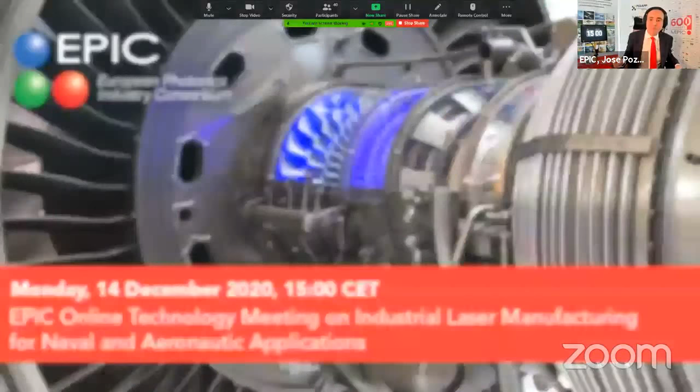Wow, the numbers in the EPIC meeting on Monday, December 14th are going to blow your mind. Imagine if using plasma at 30,000 degrees C is part of your daily routine. You wake up in the morning and today you had to build a 360 meters cruise ship made of steel with up to 40% less material and 40% less energy. And that's where photonics comes in.

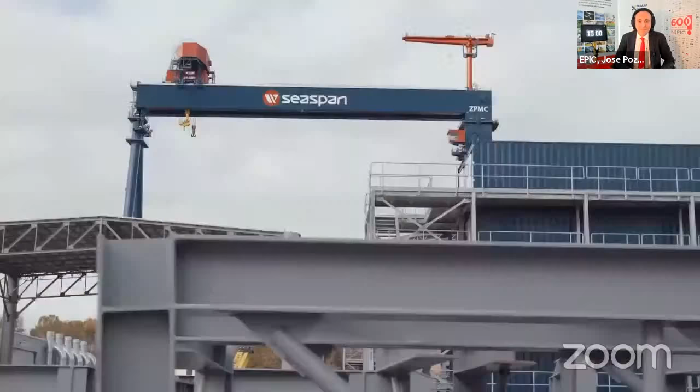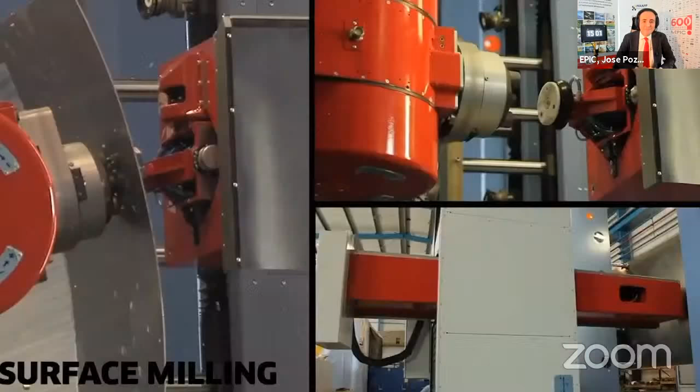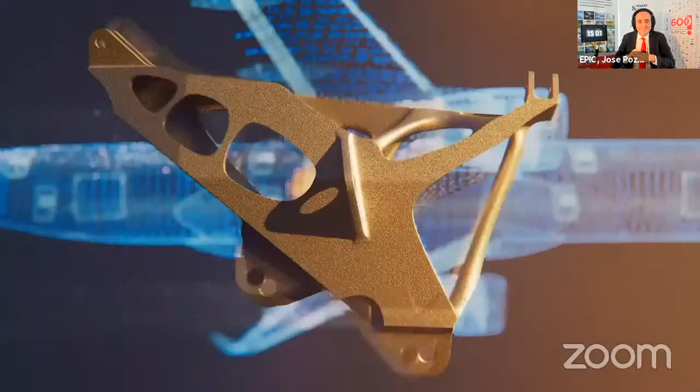Modern shipyards need laser hybrid welding processes to join vast steel panels. Heat has always been crucial in building steel constructions. Laser processes result in highly controlled metal melts to precisely fill the seam. The aircraft industry has two additional requirements: lightweight and aerodynamics. Manufacturing processes are expected to result in rivet-free surfaces. In addition, carbon fiber, thermoplastics, and new materials have to be manipulated with zero waste.

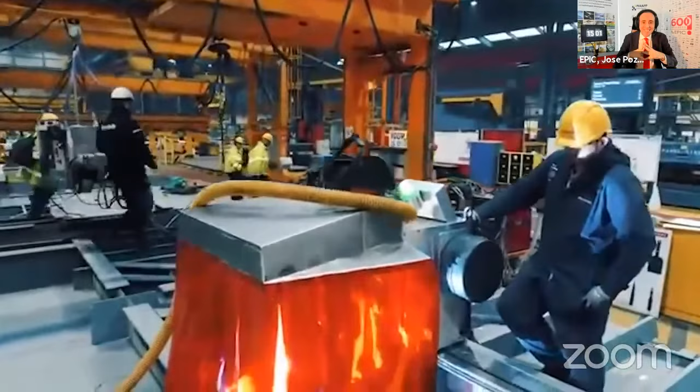And in a world of leased aircraft and marketing campaigns, quick painting and especially depainting has to be faster and cheaper. So what will the shipyard and aircraft hangar of tomorrow look like? What are the challenges in making the next generation high-power CO2 and fiber lasers? What shape is needed for the optical beam in processes involving such high power? On December 14th, we'll examine the next steps for shipyards and aircraft manufacturers and how high-power lasers and their supply chain are key to this competitive industry.

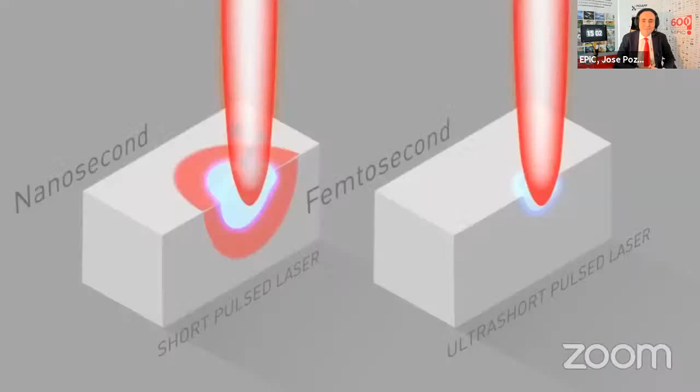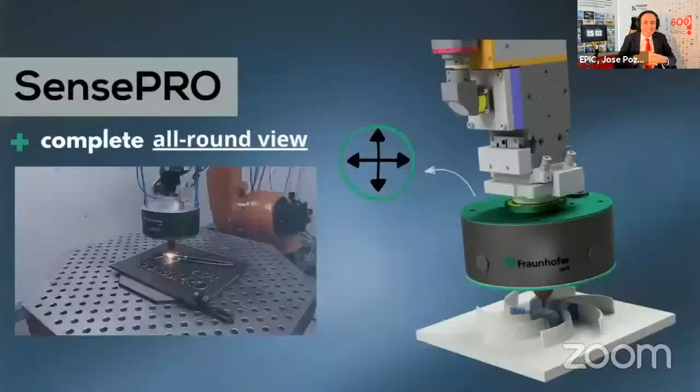My VIP list includes laser industry leaders like Trumpf, Laserline, Precitec, Georg Fischer, Siemens, Prima, Lumentum, SPI, and their current and dream partners such as Fincantieri, Avio Aero, Safran, and ArcelorMittal. And to make the innovation happen, we need the research powerhouses like Fraunhofer, AIMEN, Lasercentrum, and Hilase.

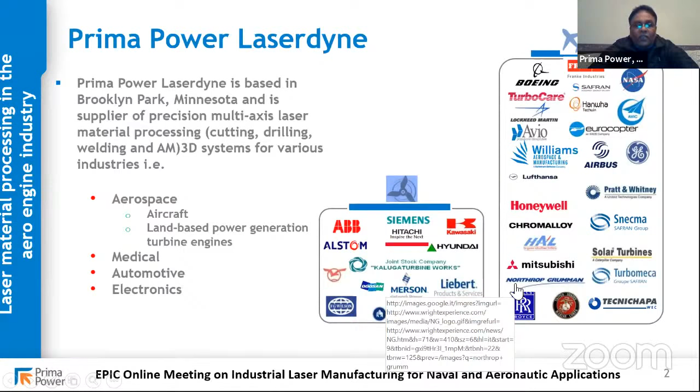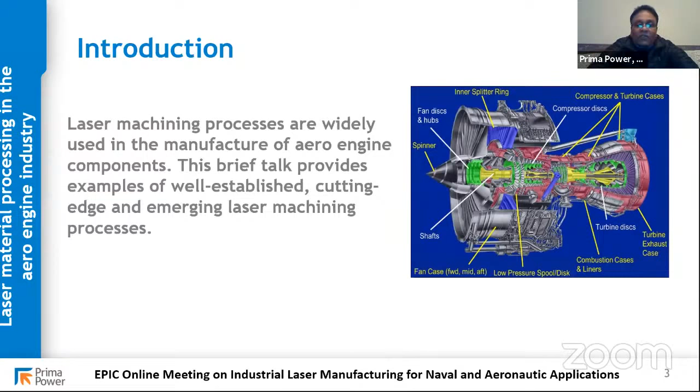In aerospace there are a lot of applications of laser processing, mainly drilling, cutting, and welding, and this presentation will highlight some examples of using lasers in manufacturing aero engine materials. As you know, laser drilling has been around many years, and it's the number one application right now in the aerospace market.

In the past, people used Nd:YAG lasers, but in the last few years they've been using QCW fiber lasers. People use laser drilling for these very difficult materials, all nickel-based alloys, which are extremely difficult to drill conventionally, so they end up using lasers. The advantages of laser drilling are that it's very quick, it's repeatable, and you can drill at different angles.

If you look at hole drilling, these are some of the components: blade, vane, afterburner. These are typical diameters; you tend to drill 0.3 to 0.5, and then typical thicknesses. The number of holes ranges from a few hundred up to 40,000 holes currently drilled using lasers.

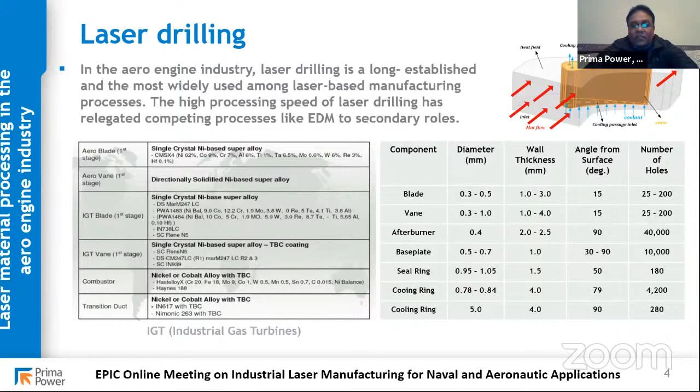With laser drilling you can drill using different methods. One is trepanning, where you actually cut the hole out. The other is percussion drilling, where you do a single shot, which is very quick. The difference in timing is large: if you've got 40,000 holes to drill, it will take a long time to trepan, so people tend to percussion drill. With trepanning, you tend to get very good quality in terms of taper and recast layer.

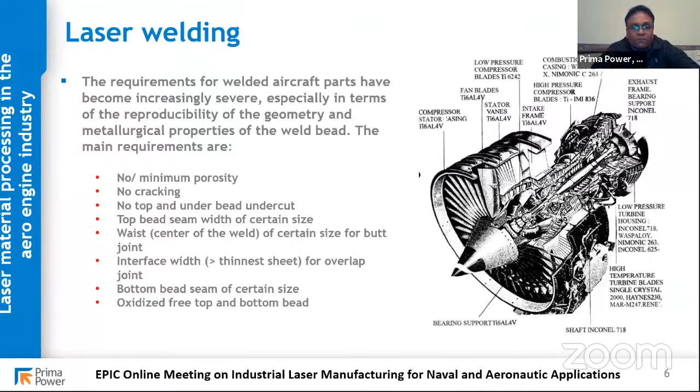The typical requirement in laser welding of aerospace material is not cycle time, but quality. No porosity, no cracking. The weld width has to be a certain dimension, top and bottom, to give the strength. Most of these materials are either Inconel or titanium, so gas shielding to avoid oxidation is very important.

Unfortunately, when working for aerospace clients, you cannot share most of the information since it's confidential, so I can just highlight generic data. This is a 3.2 millimeter butt joint alloy, again very nice weld, no porosity or cracking. Haynes 230, Inconel 718. There's also a requirement to weld this material using filler material, because sometimes the fit-up is not so good, or there are metallurgical requirements, so we end up using filler.

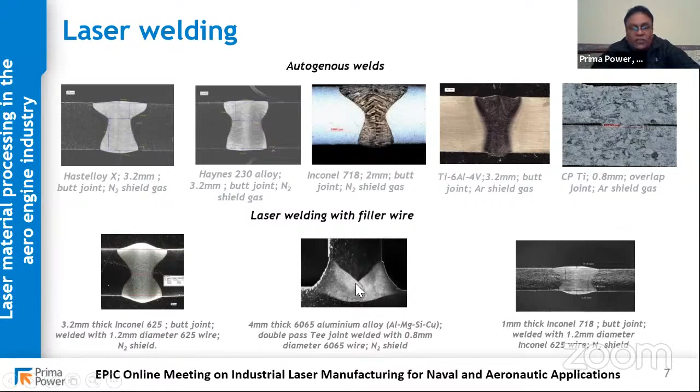So this is Inconel 625 using Inconel 625 wire, and you can see a beautiful top bead and bottom, with no undercut. This is a T-joint, again using filler material. So there are requirements for using filler in welding of aerospace material.

Laser cutting is another application where a lot of 2D and 3D cutting is being done. This is an example of a blade profile cut in 5 millimeter thick material for a land-based turbine. This is Hastelloy X using nitrogen, showing very good repeatability and very small dimensions.

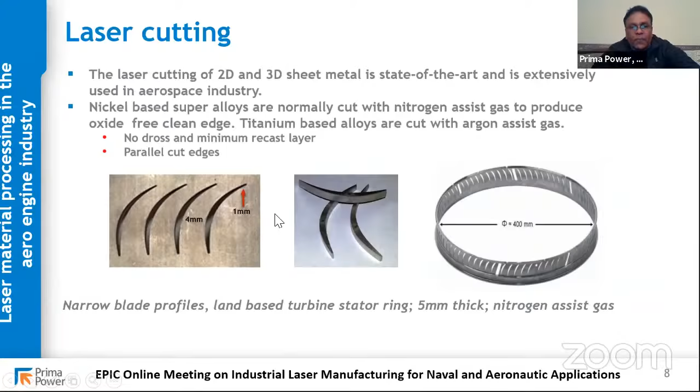Another area gaining a lot of interest is composite material, which includes plastic composites or metal matrix composites. This is one example video of a metal matrix composite. The hole depth is about 35 millimeters deep, and this is actual percussion drilling. You can see it's taken about 10 seconds to drill the hole.

The actual depth of the hole is about 35 millimeters, which is about 1.38 inches. For this one, you can't cross-section it, so we actually measure the hole taper using a pin gauge. This is about 35 millimeters deep, and now we're going to put a pin gauge through to make sure the hole is quite parallel.

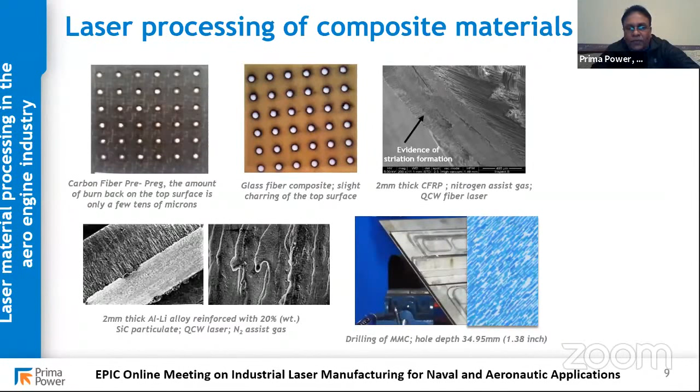So these are some of the things currently being done with composites, and the outlook, especially in aerospace and space engineering, is very promising. A lot of interest has been generated looking at dissimilar materials, so that's welding new alloys, basically welding a different grade of Inconel, or stainless steel to Inconel.

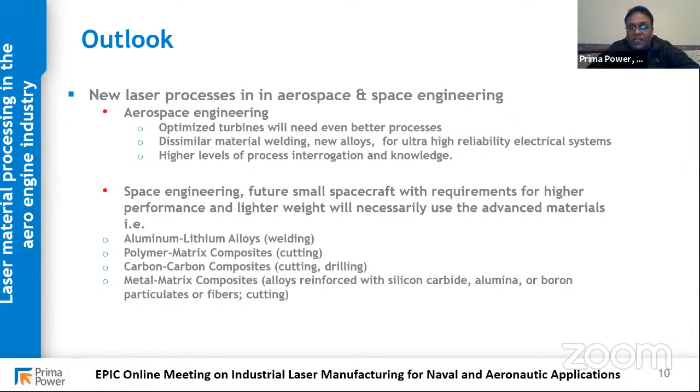There's also a lot of interest in aluminum lithium alloys, again for space engineering and spacecraft, where weight is very important. Polymer matrix composites are used again for cutting, drilling, and surface modification. The biggest interest right now is metal matrix composites, where we're looking at different silicon carbides, alumina, boron, nitride carbide, which are very difficult to drill, so we're doing a lot of work on it. Another thing I didn't mention, which is quite big in aerospace, is additive manufacturing, but that's a separate topic altogether.

So that was just a brief introduction of what lasers are currently doing in the aerospace market, especially for aero engine materials. Thank you very much.

Thanks a lot for this nice overview. So now, I'll ask you the EPIC question that everybody else will also hear, so they'll be prepared for it: what can you do for the audience, and what can they do for you? The audience has over 650 people, as already pointed out. We are a bit here, but we have potential. So Mohammed, what are your interests in being in this meeting today? There are some end users, some integrators, some laser experts like you. So what is the room for collaboration here?

Well, basically when working with aerospace material, it's very difficult to actually buy this material off the shelf. So it would be nice to work with end users who can give us the right sort of materials, to make sure that whatever R&D work we're doing with lasers is actually useful to aerospace people. Like when I showed the last slide drilling the metal matrix composite, it's very, very difficult to get this material.

So it'd be nice to have end users who make these materials work with them and see what the laser can do with that material.

Very good, so you're offering really directly for end users to come. I'm repeating this: contact Mohammed or us, and we will put you in contact with Mohammed. So composite materials, we saw you have a long list of combinations and expertise.

I'm sorry for the... Never apologize to us. The presentation is already up, we'll show it from our side. The floor is yours, are you seeing the screen now? Yes, we see the slides. We are sharing them from our side. All you have to do is present away. Okay, it's Francesca, okay, yep. Sorry, I am using a private computer and I did not try before.

No problem. So yes, I am Christophe Simon-Boisson, I am a product line manager for scientific industrial lasers. So I have 5 slides, let's go to the next.

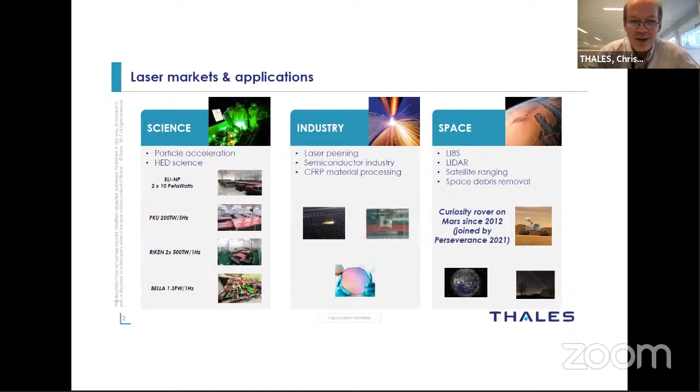Briefly, just to say where we are involved: we work basically in 3 areas. Science, where we are mostly now with very big projects - the pictures are quite small, but we have been the first to successfully deliver 10 petawatts for high peak power lasers for science. Industry, which we talk about after, but also space - right now we have a laser on Mars for 8 years, and it will be joined next year by another one which is right now in space. I don't say more, let's go to the next.

The idea is to send the pulse to a metal part. With high peak power, you vaporize some material and create a plasma. You have to confine this plasma in order to have a maximum effect, to optimize your effect, and it will generate a shock wave into the material. This shock wave is important because it creates constraints in the material - compression constraints - and these compression constraints are very useful for the lifetime of such parts.

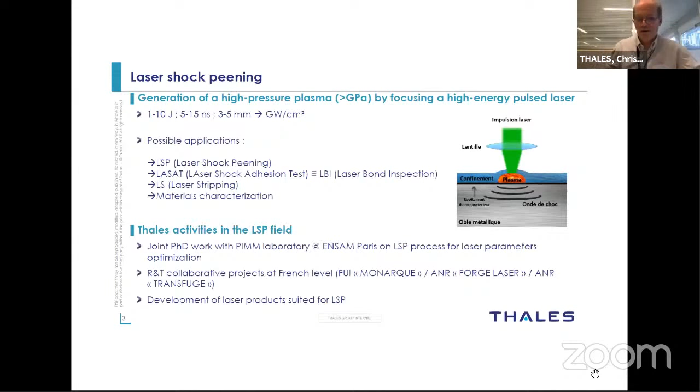And last but not least, we already have products in the portfolio, and we are also continuing to develop some laser products which we think are suited for LSP. So maybe let's go to the next slide.

So that's the reason why this process has become quite popular for aircraft industries, because by using this process they want to increase the fatigue life of parts, so that maintenance is less frequent and less expensive, because they don't have to change the parts if there is too much damage. So there are real economic stakes here.

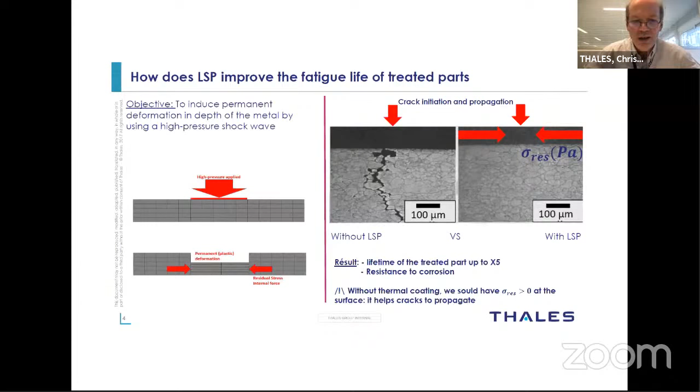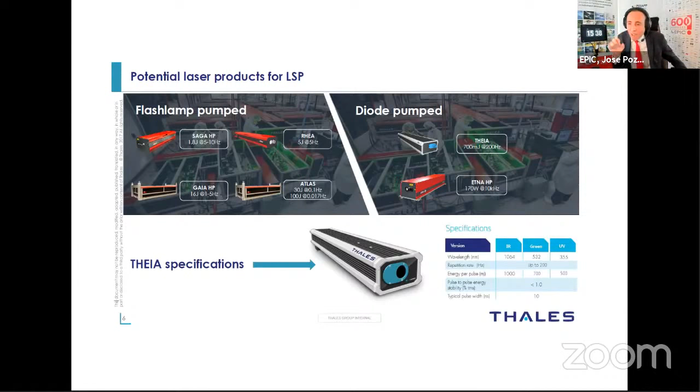Christophe, this is spectacular, really spectacular. You know, when Francesca told me that Thales was going to give one of the first presentations, honestly I was thinking they're going to tell us about their position in the market and how important it is as a prime for aerospace. You told us about the LSP technology and the clear challenges. And Christophe, we have a lot of questions for you, really a lot of questions. There's huge room for cooperation.

So let's start. I have the first question from OPTOMAN. Giuseppe, how are you doing today? The floor is yours. What's your question?

Hi Christophe, this is Giuseppe from OPTOMAN. My question was just related to the fact if you have ever tried to use short pulse lasers to perform the laser shock peening. I read some articles and it seems this could be an evolution of the standard diode pump or double rod lasers. Sorry, I did not catch your question. The question is whether you tried with a short pulse laser like picosecond or femtosecond lasers.

Ah, okay. Right now, the research group we are working with the most in Paris, they don't really think that lowering the laser pulse duration is so effective. But this is a very good question because, for example, there is one group in Japan, at Osaka, which is trying to develop the process with femtosecond lasers. To my knowledge, it's only this group right now, but there might be others in the future.

And of course, what we have to do in the very near future is to work still with nanosecond pulses, but maybe try to reduce a little bit the pulse duration. What we are doing now, our next step, is to have some first process platform in Paris at this lab with a THEIA, and try to make some process optimization and potentially parametric studies as a function of pulse duration. But at first with a limited range, typically from 5 to 20 nanoseconds.

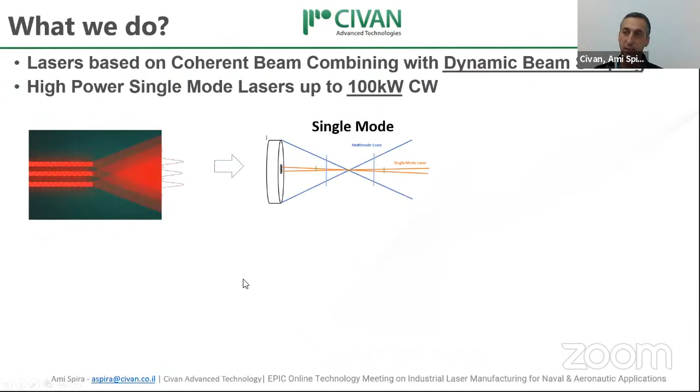So what we do is we develop high power fiber lasers based on coherent beam combining. So we can offer single mode CW lasers up to 100 kilowatts. And just to explain, by controlling the relative phase, we can control the location of the beam. So one main advantage of having a single mode laser with small diffraction is that we can have remote operation. This is very useful for welding in aerospace and aeronautic applications. And the second and most interesting thing is the ability to have the dynamic beam, which is basically unlimited beam shaping and beam steering.

So just one example of how this can be used in drilling applications. When drilling in a material that is coated, you can adjust the power distribution for each layer and very quickly switch between the different beam shapes. So what we, Civan, can offer, because we have the ability to design almost any arbitrary shape in just a few minutes, is to test in our applications lab any crazy beam shape that someone wants to try. And what we are always looking for is any challenging application that can use beam shapes or different power distributions that cannot be solved at the moment. We are always looking for new challenges to try in our applications lab.

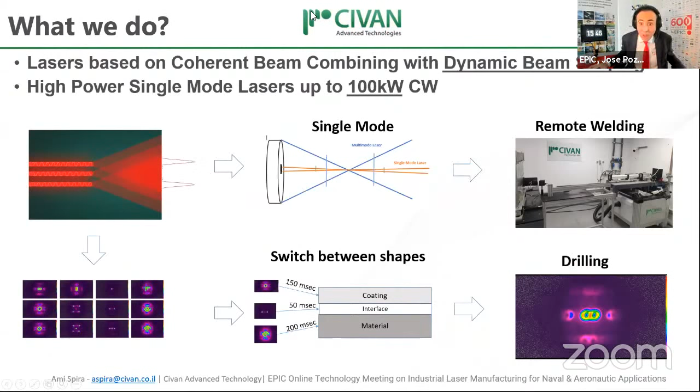Thank you very much, Ami. What kind of cooperation would you like to do with Christophe? This meeting is about cooperations. Yes. I love putting people on the spot, asking what can you do for him? Yes. So I think it comes back to what I said. We are always looking for ideas for different beam shapes that can help different processes, and designing new beam shapes that can support these different processes.

So why don't we continue the Eurovision tour? And now, wait, Ami, because there's a question for you. Tim from Fraunhofer IAPT, what's on your mind? Yeah, hello, also from my side. I have a question to Civan about the beam shaping equipment. How big is the spot size of your laser compared to a single mode laser? Because this is really critical for some applications, I guess.

Yes, so because it's single mode, it really depends on the optics. Yeah, but if you have the same optics, how much bigger is the spot size compared to a single mode laser? Is it 2 times as big, 3 times as big? So I think the answer depends on the model of the laser. For example, in the OPA6, you have what is called the main lobe, and then you can steer it or move it in a range of 6 times the main lobe. So if you use 50 microns as the main lobe, you can steer it around in up to 300 microns.

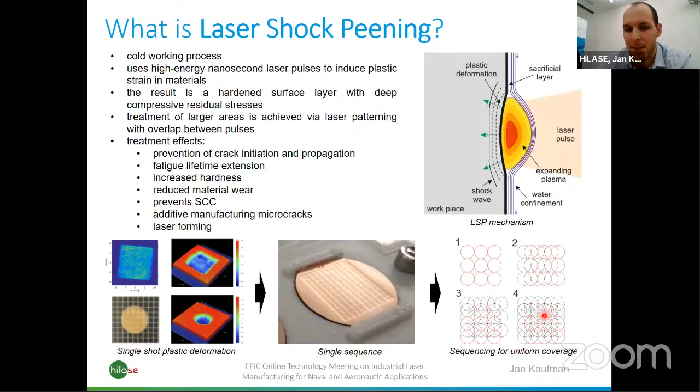The closest thing we have to laser shock peening in industry right now would be shot peening, which is very similar, but instead of laser pulses, you use these high velocity balls that basically hit the material and create this dimple, this plastic deformation, which again causes the compression underneath. There are a few key differences between these two technologies.

And the last thing I would like to point out in this section is a very unique characteristic of laser shock peening: since it's a beam of light, you can actually use it to treat parts in very hard to reach areas.

You can use it to treat some complex geometry, some cavities, which is impossible in case of shot peening, which relies on physical medium, which are the shots. So that would be that.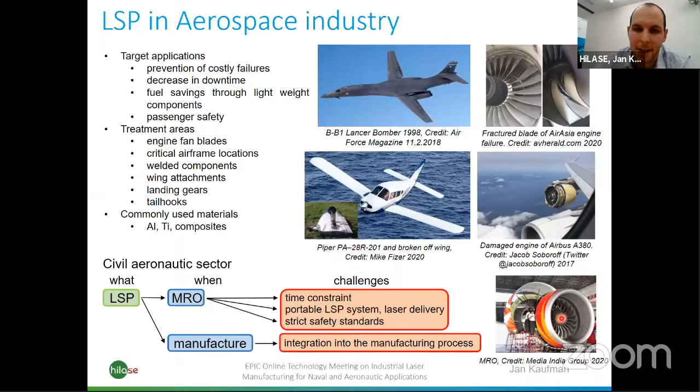So maybe an easier way would be to introduce LSP into the manufacturing process, where you integrate it directly into the process itself. And that might be an easier path to take. When it comes to LSP in naval industry, the philosophy here is to basically reduce maintenance costs, reduce maintenance in itself, and also reach some fuel savings through lightweight structures. So when you have more lightweight materials, you tend to reduce the material, and some of these joints become weaker, and that's where you can use LSP to strengthen them in these critical areas.

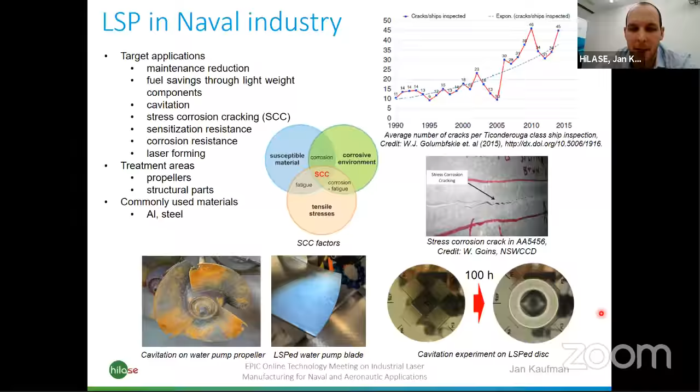So this is just an example for you to think about the LSP process. And my last slide is about our Hilase facility capabilities.

So what we are offering: we have our own LSP station, which you can see here. We have a state-of-the-art laser system, which can deliver 7 joules now, but soon in the future it might be 100 joules at 10 hertz frequency, which is unprecedented.

There is a limitation for the samples we can treat, which is a 20 kilogram load capacity of the robotic arm. We also offer some kind of, let's say, midway sample characterization, because we are not equipped to do fatigue testing or strain tests, but we are equipped to do residual stress measurements and some electrochemistry.

So the way it usually works here is that a customer comes, they bring a specific problem they are facing in their own factory or industry. We take a look, we try to use LSP on it, we try to optimize the process, and then we send the part back to the customer who tests it in their own environment on their terms. And if they are satisfied, we can keep on with the cooperation and see what comes next.

So that is everything I wanted to say, and I'm ready for some questions.

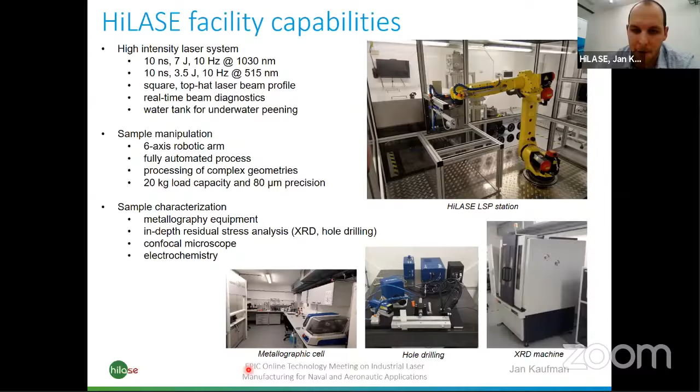So the question would be, so you offer a service, right? So your room for collaboration here is: please come to us and bring problems. That's basically what we say.

Also, when it comes to LSP, the problems tend to be very, very specific. Very often, when shot peening would do the work, there is no point doing LSP, because shot peening tends to be cheaper. So it needs to be a very specific problem which cannot be solved in any other way, I would say.

Very good. And then, do you think, so you showed your equipment, is there something that could help you from your manufacturing side of the supply chain, or are you happy with what you have?

I don't believe that. We would definitely like to expand our testing capabilities. We are missing all these fatigue machines, because they just wouldn't pay for themselves if we bought them. So it would be nice to have some kind of collaboration where we would send samples to be tested, for things like fatigue testing or slow strain rate testing and all these kinds of tests, and then send them back.

Hello, everyone. Hi. Just now I will share my screen. Yes, please. Just a second. Green button. Yes, something is coming. So, yeah, can you see it? Yes, presentation mode, I know you're clicking it. Yeah, so there we go.

We are a shipbuilding company. Basically, we are building different types of ships, very diverse ships, from let's say 20 meters to 200 meters, and ships that are tugboats, that are yachts, that are navy vessels, that are offshore vessels. We are currently in the process of building a navy vessel for the Dutch Navy, a vessel of 170 meters. And of course, also we have 2 yachts in progress. So basically we have quite strong demands of quality.

We also think that in the future we will need to implement lasers. Don't know if in the near future, but somewhere in the future. And we are thinking where to implement them. We have some issues on deformations for the thin panels. So this is the current challenge of the shipyard for the thin plates. And in general for the vessels like yachts, they are composed of thin plates. And they have high demands of productivity, so we can be very efficient and competitive on the market.

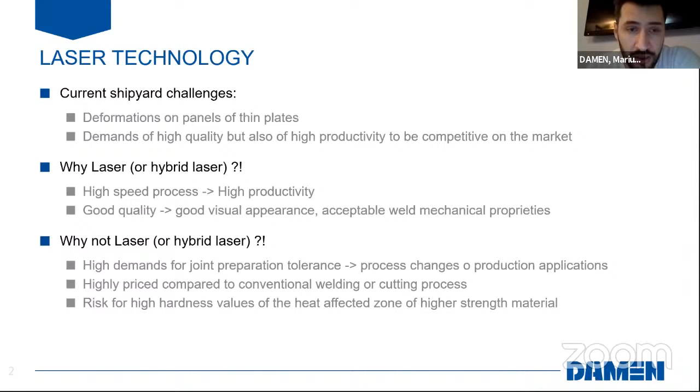We know also that there is a risk regarding the high hardness values that can be found on the heat affected zone if we are using lasers. So this will be, let's say, like a negative approach for using the lasers. I have put also some sketches with the types of panels that we consider could be executed with a laser process in terms of cutting and welding. So you can see here different shapes of the panels. The joints consist of the butt welds between the big panels and fillet welds between the profiles and profiles with the base plate. So this is the base plate, and here is the profile that is put on every panel.

What is the range of the plates? We are working with thin plates, of course, thin plates in shipbuilding. They can be thinner, but considering shipbuilding, thin plates are between 4 and 8 millimeters, and it goes up to about 30 millimeters or even 100, depending on the situation.

The material grades are A to EH36. This is a material grade for shipbuilding, and as I said, when working with higher material grades, you have a high risk of a big hardness on the area that you have cut or welded with laser or hybrid laser. So that is a negative approach.

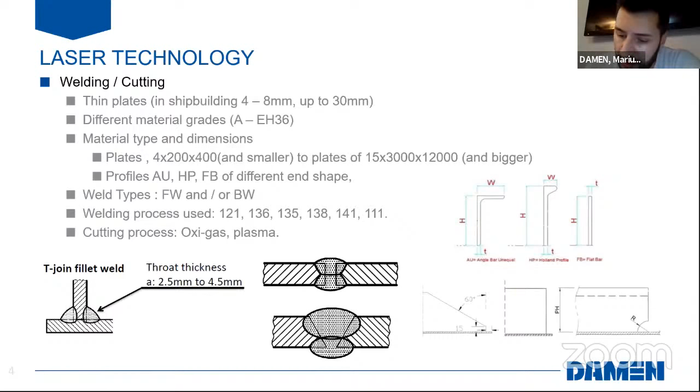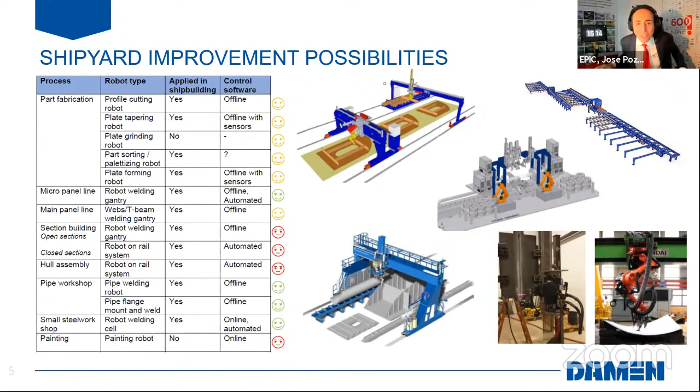Marius, you can't imagine how happy I get when you say that you're looking for suppliers. Thank you very much for a fantastic presentation, lots of room for cooperation here. I do love it. We can talk a lot about the different room for cooperation, but I'm going to ask you first about a particular challenge. If you could share with us a challenge that you think, oh my God, if I find a solution for this after this meeting, I'm going to be the happiest end user in the EPIC network.

A particular challenge, I think, will be the deformations that come on the plates from sandblasting, because the plates need to be clean before painting, so they need to be sandblasted first, and the equipment we have now deforms the plate. Afterwards we need to straighten the panel. So basically what we need is equipment that can clean the plate easily without deforming it, and afterwards be able to make it straight again if it is deformed.

All right, so the challenge is on the table, and I'm sure there are many people who would like to address it, and I have people already smiling in the room who want to get in touch with you. But I want to go with you together to Lausanne. I want you to meet one of the system integrators in this network, Alejandro De Quero from GF.

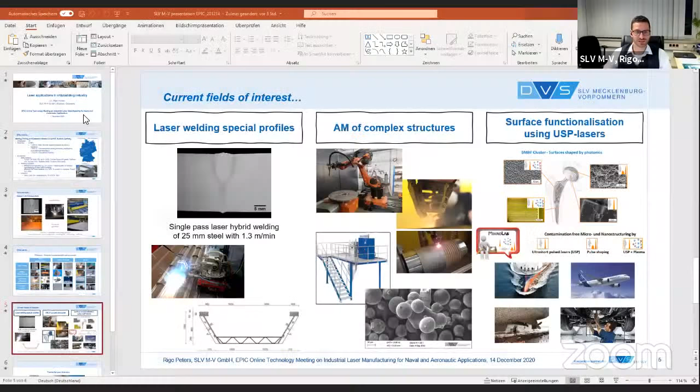I'll just share my presentation. Just a second, so you can hear me? Yes. And we'll go to presentation mode and we'll be ready. Yes, perfect, perfect. So I will also go into the topic of shipbuilding industry.

Let me start by giving a short explanation of what we are doing. We are a research institute in the northern part of Germany, located in Rostock. We have about 35 employees here, with a revenue of roughly 4 million euros per year. And we belong to the DVS group, which has about 850 employees all around the world, mainly focused in Germany.

Within our company we have three big parts: research and development, which makes about a third of the whole revenue; services, which means also small series production, as I will show afterwards; and education and training, which is always important for companies if you want to introduce new processes—you also have to train the people.

We have a lot of laser equipment here, starting from conventional big lasers like 12 kilowatt disc lasers, 10 kilowatt fiber lasers. But for our customers, we also work with 20 kilowatt diode lasers from Laserline, for example. And for smaller parts, we work with pulse systems in the green and infrared, down to femtosecond and picosecond lasers for special surface treatments, as we have heard also today.

Many of these laser systems are combined with handling systems, CNC based and also robot based. The idea is that we can combine all the laser sources with the different systems to get very easy access for our customers to real production lines.

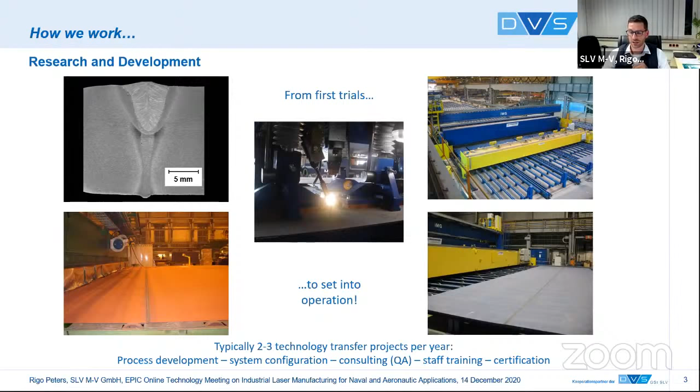That is the way we work, and we work in this way across different research topics. We can divide it, for example, into basic or fundamental research, which is typically public funded research projects. If the customer wants a fast track, we can also do contract research—compared to publicly funded R&D, which usually takes 2 to 3 years, contract research can deliver a developed process within 6 months, for example. And if the company says that's a nice product and process, we can also do services and small series production until the company's own system is developed and installed at the customer site.

In these three fields we work on different topics, including laser welding, as I have shown before, and also additive manufacturing, which is a quite big and strongly growing part. We have also seen some of these applications in the earlier presentations.

For example, here the repairing and 3D generating of special turbine blades, and also laser microprocessing is a topic which has been growing fast in the last years, namely in femtosecond and picosecond laser systems, where we are doing topology and surface functionalizations on big scales.

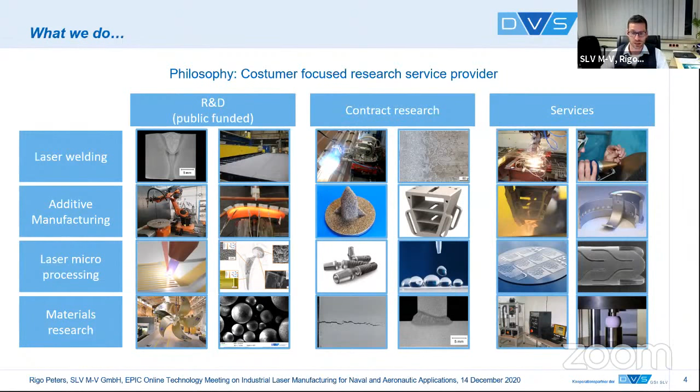And of course, you cannot do something there if you don't have materials research, which means that we have a lot of analysis. For example, maybe it's interesting for Jan from Hilase, we are also doing fatigue testing of different parts for ship propellers and propulsion systems, and several fatigue tests for bearings. And at the moment, there are certainly some fields of interest where we have a focus on.

First one is the laser welding of special profiles. On the left side here, we see a single pass laser hybrid welded profile with a thickness of 25 millimeters EH36, as we have seen in the last presentation. Here the welding speed was 1.3 meters per minute, which is quite high at this thickness. If you weld 5 to 8 millimeters, which is common in cruise liner production, today's state of the art, I would say, is between 3 and 4 meters per minute welding speed.

Of course, you have some issues with the hardness, but with sophisticated and stable processes, that's I think not an issue anymore, and it is widely used in the automotive and shipbuilding industry. One interesting point is that you can use not only static and large systems for this welding. We have also developed, together with partners like Trumpf, Fronius, and other companies, mobile equipment, which you can see on the left side, where we can weld up to 12 or 15 meters of panel length with a mobile tractor equipment, which is fiber coupled to the laser and can be used within the yard.

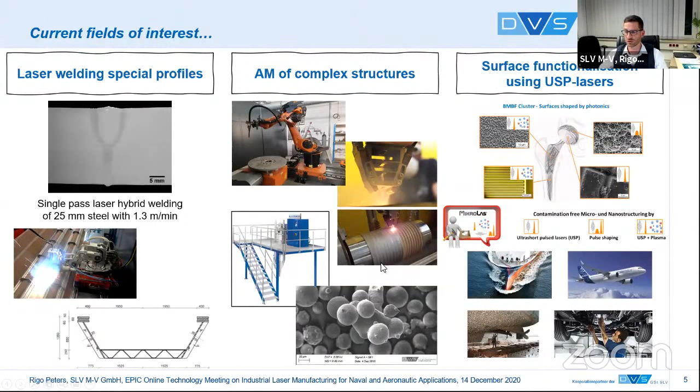But for example, also for the talk from Marius, there were some very nice studies in the last years from companies like IMG or Prima and so on. And they've shown that for a standard cruise liner, which, for example, is built in Papenburg, they saved up to 2 to 3 million euros per ship just due to the less deformation and to a lot of saved time overall when they use laser instead of conventional MAG welding and/or TIG welding or whatever. And at the end, this saves a lot of money, and this is always a very interesting point to look at. Okay, and that was the point from my side.

Rigo, thanks a lot. Nearly in time. Nearly in time. Now, thanks a lot, Rigo, for your contribution. It was really a nice and intense slide, the last one. So really nice to show what the SLV can offer, and also you related already to other contributions before. So it's really great. So I knew also, being my laser guru at the beginning of my PhD, you would have spent a few good words about lasers and not the traditional welding and other traditional technology. So it's really nice to have you here.

So you said already a bit of, let's say, what can you do for them? So where do you see collaborations here also in the room? Yeah, so for example, one big point is, as I also see the question from Christophe from Thales, if you go to scaling for large surfaces, you of course need high average powers. And at the moment we are trying to invest also into laser sources in the femtosecond regime with more than several hundreds of average power.

And of course, if you want to have a surface functionalization of a whole ship hull, then you would need, I would say, at least several kilowatts of average power to get a process which is cheap enough to come into the market at the end. So in the best case, I would need 5 kilowatts, 400 femtoseconds. That would be perfect. Okay, megahertz. Because I tell you, what we have in Lampas, that is also a European project, we have a few picosecond, but a bit less kilowatts, so like 1.5 kilowatts for a few picosecond. Maybe we don't cover the ship, but we are on the way.

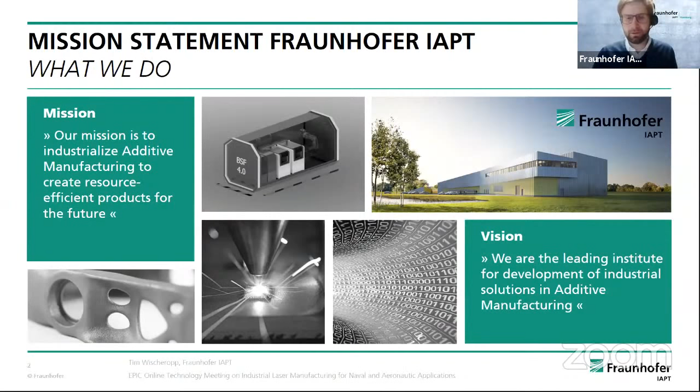We have quite a big variety of different additive manufacturing technologies, but our biggest competence is laser additive manufacturing. So laser powder bed fusion, laser sintering, and laser metal deposition are the laser additive manufacturing technologies we have in-house. And we focus on different markets: aerospace, automotive, tooling, and medical. So that's basically what we're doing, trying to further develop the technologies and help the industry utilize additive manufacturing.

So what do we offer? We can offer a big variety of different services to the industry. We have quite some history in working with smaller companies going into additive manufacturing, enabling them through trainings. We have a lot of different trainings and courses on additive manufacturing that we've done for 7 years now at the institute. We help companies identify the right parts, so where you can utilize additive manufacturing in the best way, doing specific material or process qualifications, and we have a lot of experience in bionic designs, new designs with additive manufacturing.

But we also work a lot with machine manufacturers and really established companies in the field of additive manufacturing to further develop the technologies and make the next step in additive manufacturing. And probably most of you already know that there are a lot of advantages we can take from additive manufacturing for the different markets, like low material weights. We have really good mechanical properties.

But from my point of view, and as you probably know from my title, I'm the head of the design team, so I really believe that the most important advantage in additive manufacturing is the big design freedom that we can use for our different designs. And you probably know a lot of examples where you use this design freedom for bionic designs, for lightweight designs in aerospace industries, etc. But I think the real advantage is when you try to combine this lightweight design potential with other functionalities that you can optimize in a specific part.

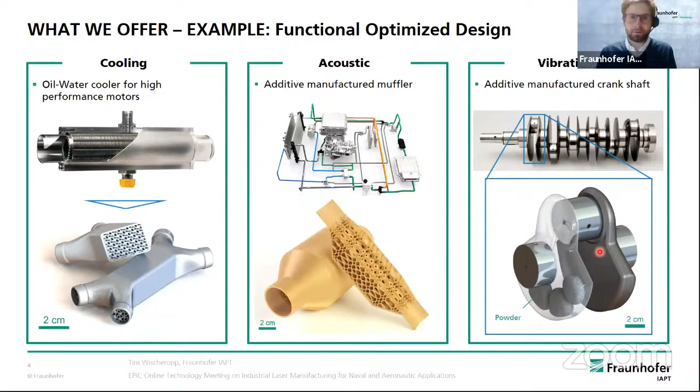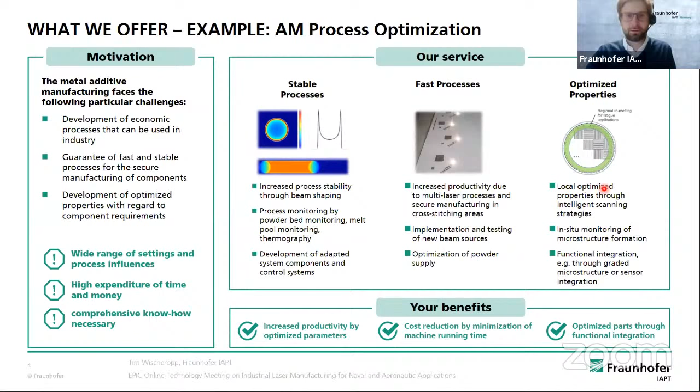Another thing I wanted to highlight is our competence in optimizing the AM processes themselves. We have a lot of examples where companies come to us with problems with the quality of specific parts, or the parts are too expensive so they need to increase productivity of the process, or they want a specific material that's not available for additive manufacturing. What we do is try to help them optimize the process so it meets the requirements of the customers. Here are some examples of things we do, trying to optimize the stability of the process, for example by beam shaping, which we already discussed earlier, developing faster processes, and trying to locally improve the mechanical properties of parts. These are just small examples, obviously I can't go into too much detail.

So the last question is, what are we actually looking for here at Fraunhofer IAPT? There are two different categories I'd like to highlight. First, we are looking for companies that are trying to use or implement additive manufacturing in their company. Maybe you're at the start and want to know if additive manufacturing is feasible for your products or not. We are happy to help with that, we actually do free part screening, basically evaluating if there's a technical and economical sense to use additive manufacturing for your specific parts. Or maybe you already use additive manufacturing but have specific problems, maybe in the quality or stability of the process. We can try to help you with that.

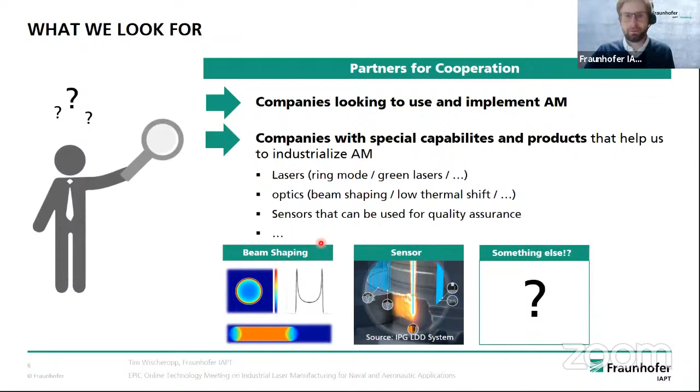On the other hand, we are also looking for companies that have special capabilities and products, especially for laser additive manufacturing, because we think there's quite a lot that can be optimized in the process. Here are some examples: if you have special lasers that might be worth testing, like ring mode lasers or specific wavelengths to improve the process, or you offer specific optics like beam shaping optics, or optics with low thermal shift, or specific sensors that might be interesting for quality assurance in additive manufacturing. We're happy to try that out with you and see if there's a market opportunity. Or maybe there's something else I haven't mentioned that you think is worth trying in your company. Take a look, if there's something for additive manufacturing, I guess we are a good start to look into that.

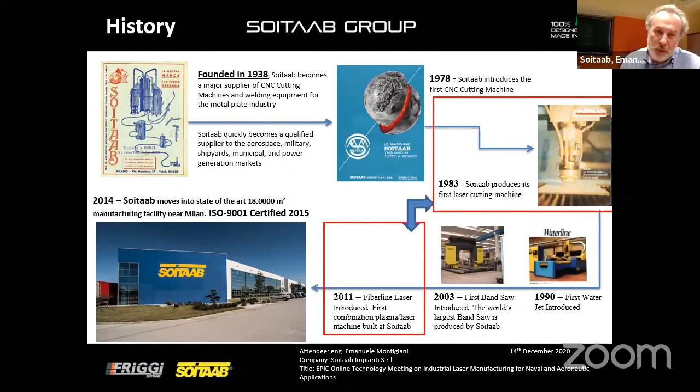And then we went back to fiber laser early in 2011. We are an Italian-based company in the Milano area, where we produce almost everything in-house other than the laser technology itself, in terms of source and optics, but we do the machining, which is our goal. Our goal is to create a CNC cutting machine in 2D for any kind of thermal technology, from oxy-fuel, plasma, water jet, and high-power fiber laser.

What is our specific behavior, our specific 'cookie' that we can give to the market? The fact that we have an internal capability for large dimension cutting machines. Specifically, in laser cutting machines for steel plate, and in particular for the Navy industry and shipbuilding, we can provide from 12-meter machines with a changing pallet, even higher, with the possibility of not changing the pallet and moving the material, but like a standard plasma machine in a long size area. We can cover up to 48 meters for cutting.

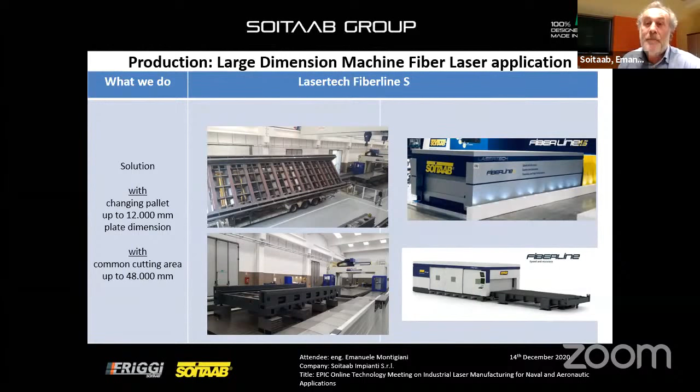Material, specific material for mild steel. What is the differentiation that we can provide to the market, specifically in the Navy market, is the fact that we are really capable of bevel cutting, not only vertical cutting but even bevel cutting. Bevel cutting on a steel plate - we're talking about 2.5D dimension, not 3D - but we cover from 0 degrees, the vertical one, to plus or minus 45 degrees on mild steel applications. Then we will see the strengths and worst cases in the naval industry.

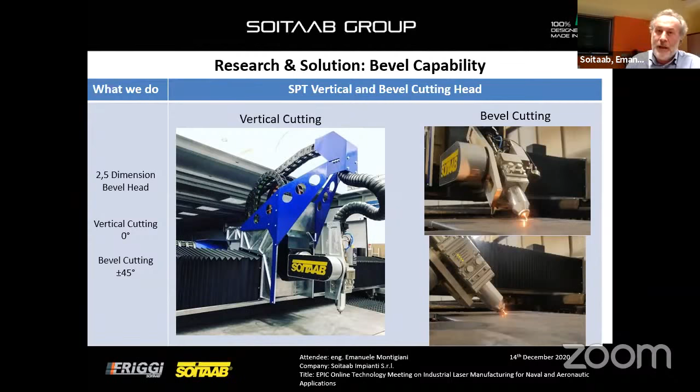Here we have some of the latest applications that we've developed in laser cutting, starting from a vertical profile. When we talk about cutting material for us, we're talking about thicknesses from 4 millimeters and higher - 12 millimeter, 19 millimeter, 25 millimeter, 30 millimeter - that have been provided with a specific laser using beam shaping processing.

Why did we do this? Because we would like to understand and reach a surface quality as similar as possible to a plasma surface, so very low roughness. That's the vertical cut, but we've also provided the possibility of cutting in a V profile or Y profile for welding preparation. There are examples we did on 20 millimeter mild steel - V profile at 30 degrees, or a Y profile with a 6 millimeter weld bead, or even lower.

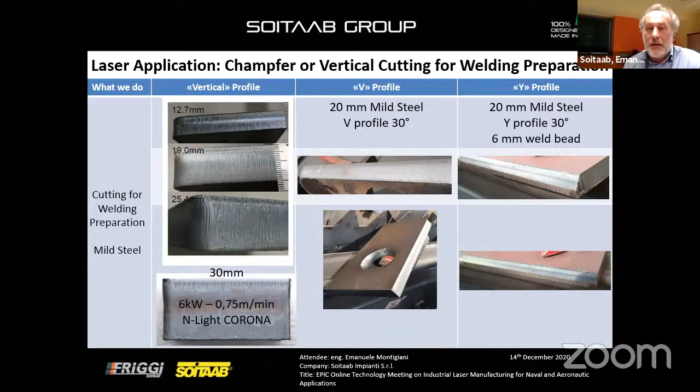That's the point we would like to really emphasize in the near future - the possibility of Y and X profiles with a welding preparation that's very accurate, narrow, and precise.

So why are we interested in participating in this meeting, or in this field? It's the fact that we are a company that has for a long time developed classical thermal cutting like oxy-fuel and plasma cutting. But we think, as many players in the market think, that fiber laser, specifically even at middle to high thickness levels, will become more and more applied and requested.

Specifically for all the possibilities around welding requests. For example, the fact that fiber welding can require a specific particular quality level, or the fact that the narrow edge or bevel cutting has to be as precise as possible compared to the classical cutting technology.

This will, for sure, put more emphasis and strength on the research of laser cutting capability with a wide range of possibility to cover, for example in the shipbuilding industry, a wide range of material thickness from 4 to 30 millimeters, with the possibility of cutting with beam shaping. We can ensure a lower level of roughness, a better quality surface, with a wide range of material thickness, using a middle range of high power laser, or even higher, to keep the cutting quality constant, even not using the highest power available in the market. That is permitted thanks to the beam shaping possibility present now in the market.

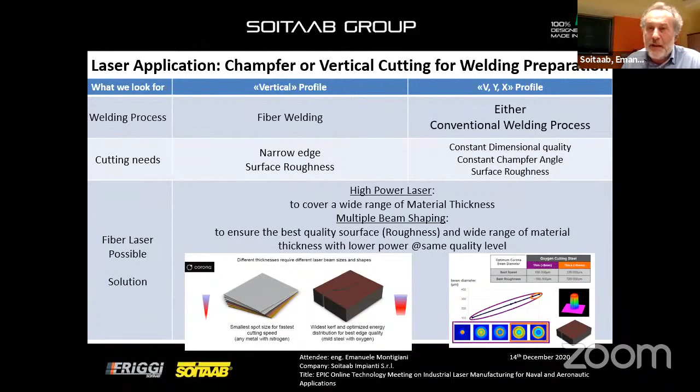So what could be the possibility of the latest laser application on this thickness? What could be the cutting quality, and what could be the chamfer application on this specific material? That's why we are looking for fiber laser solutions, in two ways: high power laser, or multiple power distribution. This brings also the question of having an optical solution, as much as possible a high power cutting head, or a cutting head that can manage multiple power distribution. Another specific and really targeted demand is the nozzle design, in order to not only cut vertically, but also in bevel, and to permit our head to follow the bevel process.

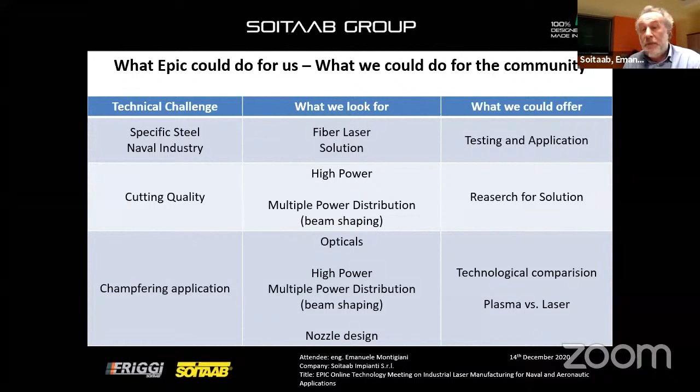This is what we offer, and we really thank you very much for the attention and for everything.

Thanks a lot, Emanuele, for your contribution. Yeah, so it was clear, nice Christmas list.

So fiber lasers, do you have maybe some more specifications? You say high power, if you have a bit more specs that we can share with the people here in the room, but also maybe give it to the 650 companies?

Yeah, right, absolutely. We are really looking into the high power, meaning higher than 10 kilowatts, 10, 12, 15 kilowatts high power, that permits us to have great performance at a middle to high level of cutting, let's say higher than 12 millimeters up to 30 millimeters. That can also permit the possibility of having bevel cutting, even in the middle range thickness, but with higher performance, because at the end it's always a comparison between productivity.

At the moment, the classical conventional cutting technology in the shipbuilding industry does not have laser as a major focus for cutting long panels, long processes, and whatever it is. So we think that in the near future, emphasis on power or on beam shaping can be really, really interesting.

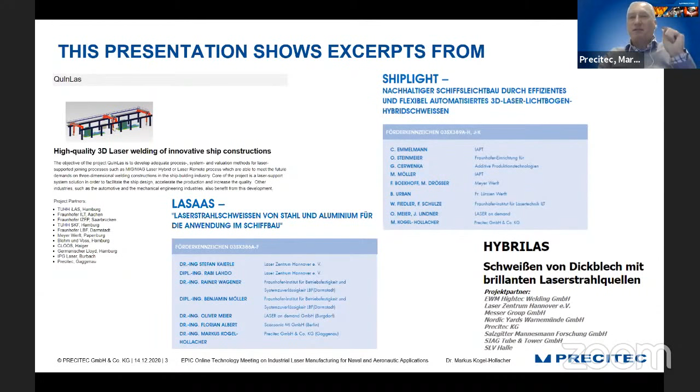So we are pretty sure if we start projects like this, that we really work in the direction the end user wants the project to go. Let's start with one of the projects where Laser Zentrum Hannover was one of the major partners.

This was a project where we first tried to bring hybrid welding for extreme thick sheet into the shipyard industry. The idea was to have a one-sided solution, and we combined the laser processing head with a one-dimensional scanner, and two MAG torches, one in trailing, one in leading position, to be able to weld that thick sheet from one side.

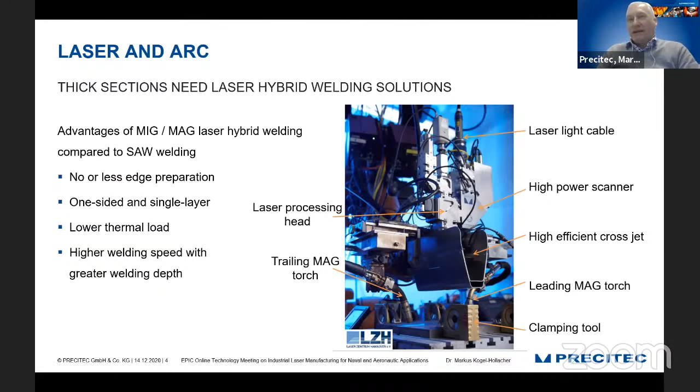So we had the results. We had to use a 16 kilowatt laser, arc power 2 times about 5.5 kilowatts. I think we had a very fast process, and a slight joint preparation of a Y seam, but we were able to weld 20 millimeters directly one-sided. Actually, in comparison to other projects, we directly welded 1 meter length, because we have seen that just welding pieces of 20 or 30 millimeters always works.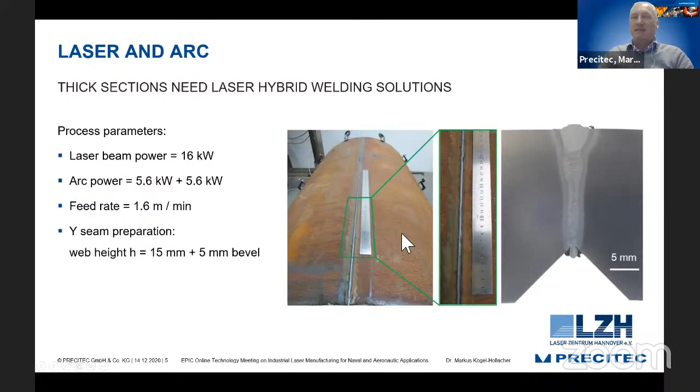But if you want to show the results in nearly shipyard application dimensions, you need to weld a little bit longer sheet. Next was a project where we worked together with Fraunhofer IAPT and Fraunhofer ILT, and very important with the company Cloos, to bring 3D laser welding into innovative ship designs.

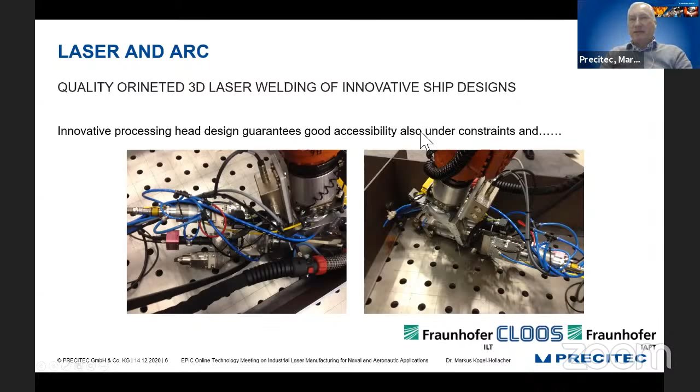The idea was not only to weld in typical weld positions, but in all the weld positions happening in shipyards - vertical, horizontal, going up, going down. That's why we oscillated the laser beam with the robot, and we had a very high innovative seam finder - I will come to that later. This innovative processing guaranteed good accessibility also under constraints, which is important for Damen.

We built a very, very impressive gantry system only for this project, with 3 robots at the end of the gantries. That gantry system was built especially for shipyard applications, and this is now one of the bigger halls at the Fraunhofer IAPT.

So we can weld very, very big parts, and as I said before, the demand always is to have sensors to directly control the process result. The idea here, developed by Fraunhofer ILT, was a texture-based seam geometry and tracking and gap measurement system. We used the sensor technology with respect to measure process emissions, to directly tell something about the weld.

In situ, we also had a seam geometry sensor based on laser triangulation to measure the resulting seam geometry based on the DIN EN 13919, which is a norm only for laser seams.

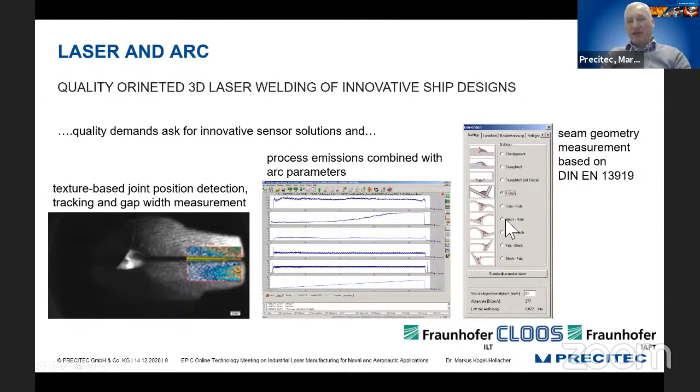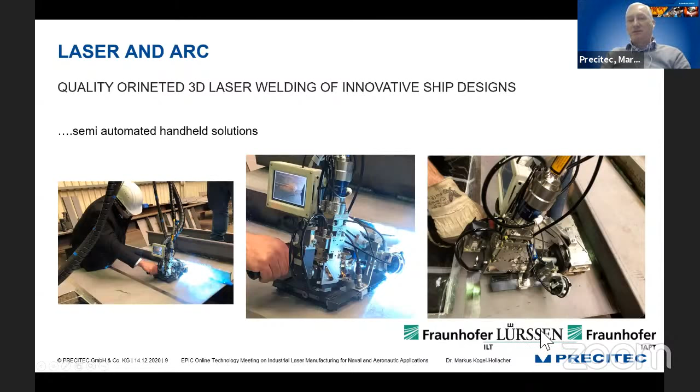One of the more important things nowadays in shipyard industry is to reduce the weight. One possible idea to reduce weight is to bring more aluminum into shipbuilding industry. Together with Laser Center Hannover, we were working on a project where we tried to accurately join aluminum to steel.

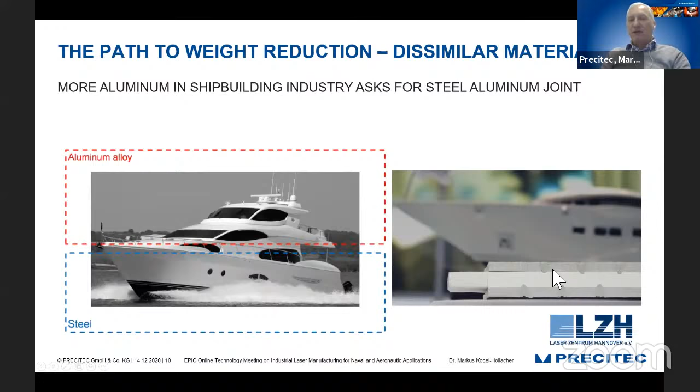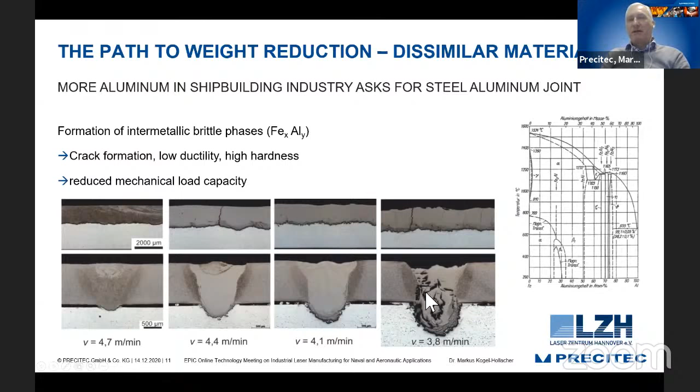For everybody who knows welding of dissimilar materials, this is a challenge, and it's even more of a challenge if you go to thick section applications. You see here that if you do not weld deep enough, you don't get any joint between steel and aluminum. And if you go too deep, you will get brittle intermetallic phases. That's why it is crucial to have a sensor able to detect the penetration depth.

For that, we implemented our well-known OCT device to measure and control the penetration depth. That was combined with a Scansonic processing head in that project, and now we were able to directly control the penetration depth.

For those who don't know the OCT device, it is all based on fiber technology. Every electronics needed are in the cabinet, in the control cabinet. So everything you see mounted on top of the welding head is without any electronics. That is especially designed for industries like shipbuilding, where we have to stand very, very high demands of robustness.

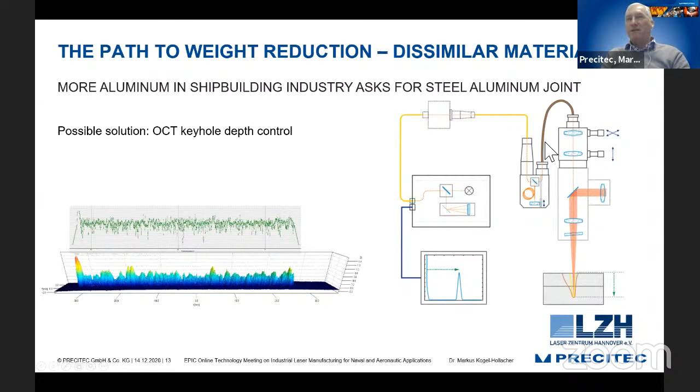So just some messages for you to take away. Shipbuilding industry, as we see it, is continuously incorporating innovations, but it's a long and winding road, because even if the companies who take care of the norms are part of the projects, it really takes some years that new processes can be implemented in shipbuilding industry.

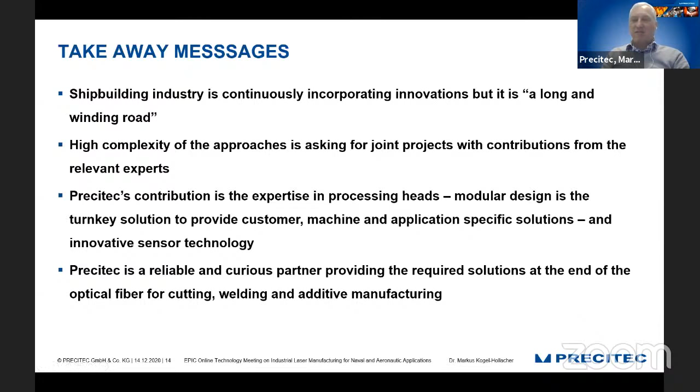Nevertheless, we have a high complexity of approaches, and as we see, the contributions from relevant experts really bring solutions much more fast into the different applications. We have been, and we are still, and we will be a reliable and curious partner for these solutions for welding, cutting, additive manufacturing, and for partnering in joint R&D projects.

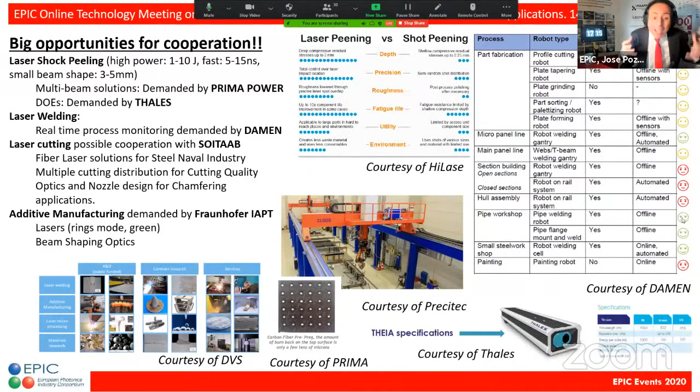This, in my opinion, has been a great meeting with a lot of opportunities for Teraxion and for many of the other EPIC members. Actually, I'm going to summarize here some of the opportunities for cooperation. We have from Prima Power, multi-beam solutions. We have from Thales, DOEs. We have from Damen, process monitoring. We have from Soitaab, fiber lasers for steel, multiple cutting solutions and optics and nozzle design. And Precitec was very happy about this. And we heard from Fraunhofer IAPT, we are looking for new laser sources and beam shaping optics for additive manufacturing. We heard from all of you, and I summarize this in the slide.

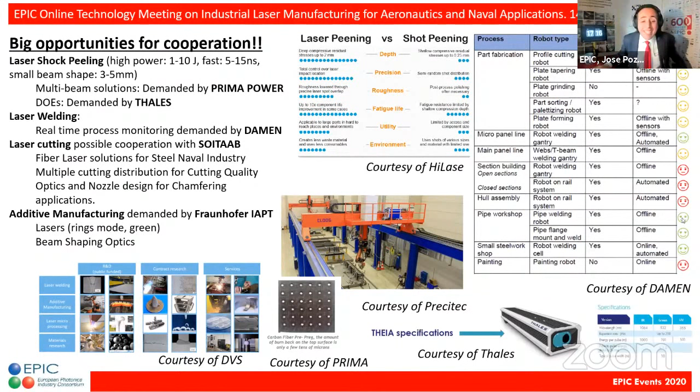I really love this meeting, Francesca. Really, really great job today. Really great job for everyone. I live in Noordwijk, next to the sea, and the government is saying today that the whole Christmas is going to be a lockdown. I don't mind, because I have 300 hours of footage that we have collected over the whole series of online technology meetings.